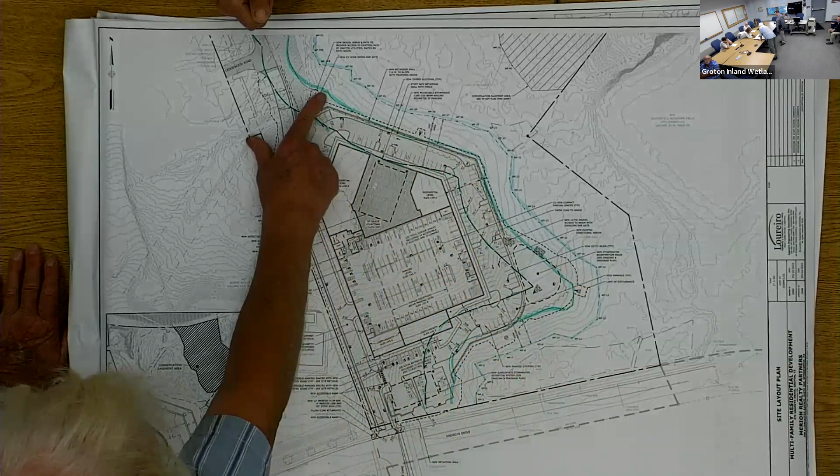There will be planting, I would say, around the toe of the basin would be a prime location, where we have the outfalls. This one's for stormwater. These areas are good. And at the toe -- now these are retaining walls, so below the retaining wall is going to be the area that we're working with. So we'd be planting here, though, you know, here's very steep, but in this area we do have opportunity for planting.

So in some places it's fairly narrow, but in other places I noticed there are invasive trees there. So this tree canopy may also change to some extent where we're removing invasives, say for instance if there's a tree of heaven or a black locust. So those could provide planting opportunities as well.

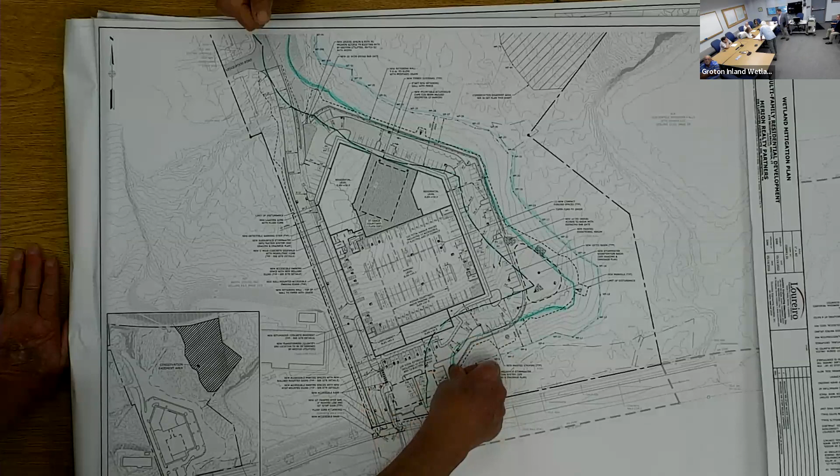So that's one of the reasons that I don't like to show each individual tree. I'd rather give you a number of the quantities of what we're going to plant, and those would be field located based on the conditions post-construction, which we can't know now exactly.

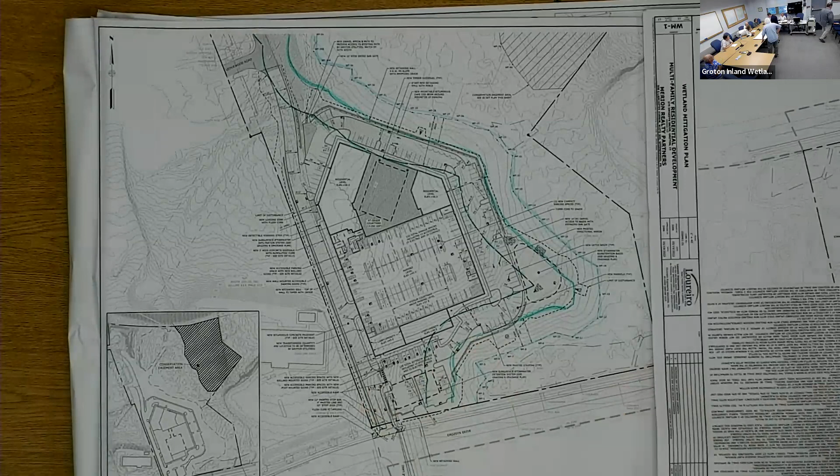Seamus Ryan for the record. So that's what this plan shows. We didn't put exactly where the trees and shrubs will be, but all of the green areas, based on the color code of the plantings -- green column here, red are in the red column, and gray are in the gray column. So using these plantings, using the list with this color code, Jim will place them where he sees fit in this area.

But could you please point out the existing tree canopy on this map? Yeah, it's right here, still the scallop line. So there will be planting with... it looks like. I remember this map from the last time, and that's why I'm asking this question.

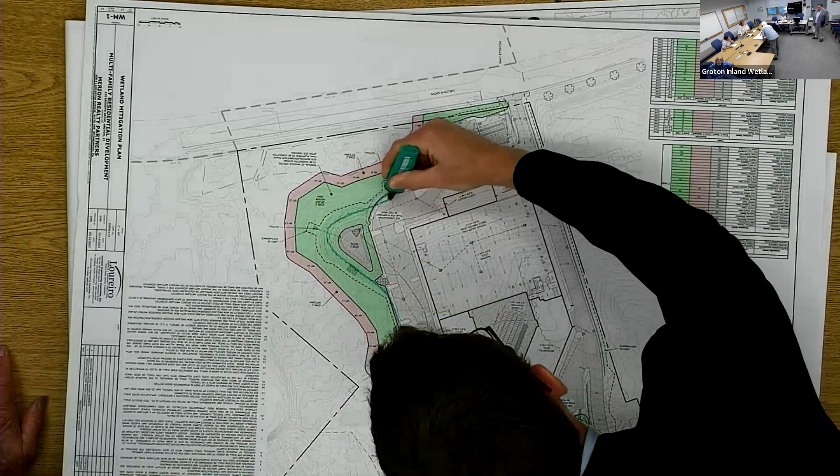So I'm just making sure I'm clear - that's the edge of the canopy. Right, the trees are, you're going to set back, protect the creek tree cover, the canopy line, but then you're going to be working within the 50-foot upland review area.

Right. And so in some areas, the tree canopy currently is thin, that we'll plant. In other areas we have a denser tree canopy.

So we've provided an adequate number, and what I'm recommending are small wildlife grade trees that are more affordable. There's a couple of reasons for doing that. Planting wildlife grade material, they're seed grown.

So they're New England ecotypes, as opposed to a cultivar that might be from North Carolina. I like to use New England stock, and the seed grown will reproduce and have viable seedlings. Whereas a cultivar, they're all genetically identical, and so even if they cross pollinate, you don't get the diversity that you would from seed grown.

The other thing about smaller seed grown plants is they're easier to install. It's a rocky area, so if you have to get a tree spade in there to plant a big root ball, it's more difficult, and they don't tend to do as well as a smaller seed grown plant.

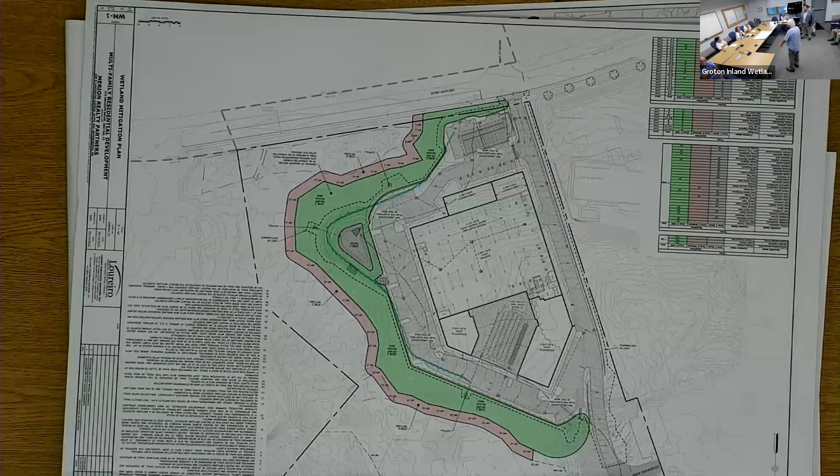Okay, well, yeah, absolutely. I don't anticipate - if I were going to have a third color here, it would be right along the edge of the silt fence.

Well, that's why, quite honestly, his picture was better than yours. Shay was just saying, because this one - this is the one I remembered from the last time. And I'm like, that's right.

So the planting's mostly going to be along the limit of disturbance, between the limit of disturbance - say, which is where the silt fence is - and any retaining walls or pavement. So you might be on the other side of the silt fence in some places.

Yes, and those are places that would be appropriate to go across because the canopy isn't thick there. Again, there's - I usually trust you.

Mhm, but unfortunately, in the real world, stuff happens. Do you know what I'm trying to say? Yeah, stuff happens. Right, well, stuff happens, yeah. And that's - I just, we've all been playing this game for 30 years, and we just have seen a lot. I know, and I have also, I know.

I get called after everything's built and asked, will you come and inspect it? And the plans - I was supposed to be there before you started, and I was called in three years later. So that's just my only concern, because now we're basically saying okay for work.

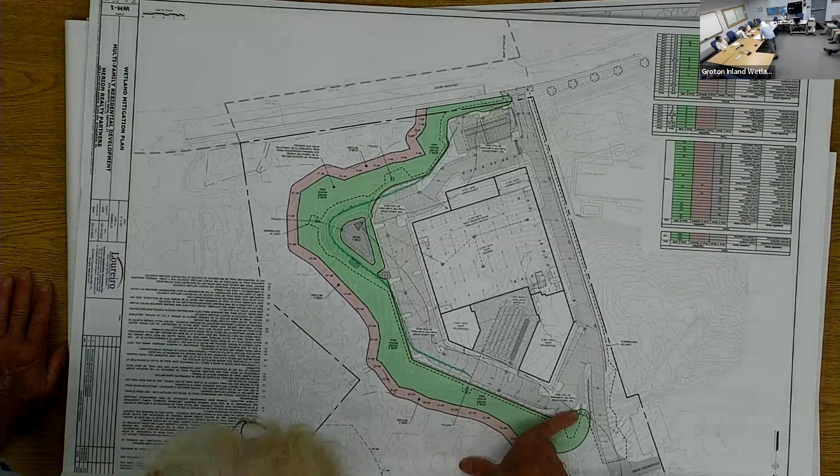One of the things around the perimeter, just as an attention to detail, any place where there's not a retaining wall—I don't know if there are very many places, I think down in this area—what I recommend is a no-mow ecological lawn seed mix that doesn't require lime, fertilizer, or water once it's established. It can be mowed, but mowing's optional. It only gets nine inches tall. So it's an informal grass edge, but if you're getting out of your car, you don't want to get out into a four-foot tall meadow.

Can you remind me how tall the retaining wall is? I think at the highest point, in one section, it's all one height and then tapers. Three to six, is that what you said? Sorry, six feet at the highest point in one section, but it tapers with the grade down there. Tapers with grade, gotcha, sorry—I'm getting older by the minute, my hearing's going.

The point is, typically on a project like this, usually a three to five foot verge, which is the edge of pavement, is a mow zone, just so people can get in and out of their cars or walk and navigate. So that area would be a no-mow lawn seed mix.

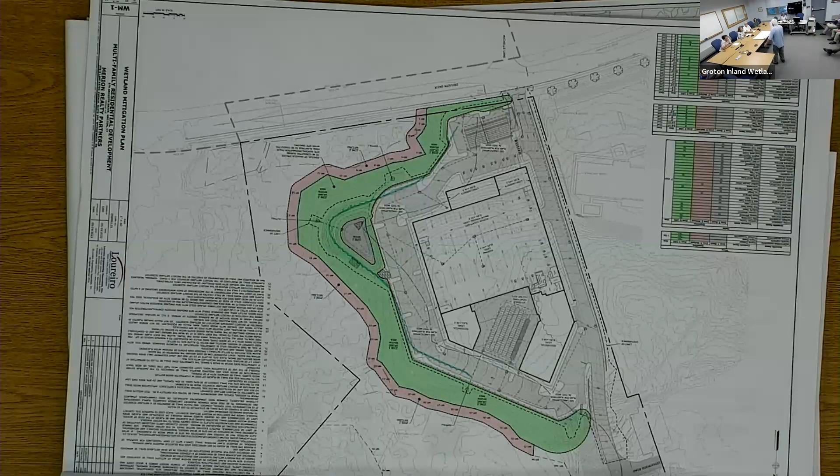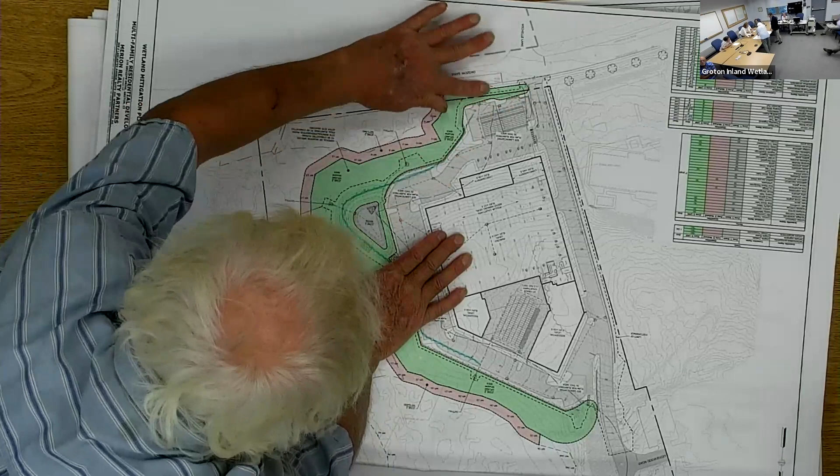But where is that, Jim? So if this is the retaining wall, you're gonna mow on the other side of the retaining wall? No, along this edge here, below the retaining wall, there's a parking area, and I don't know if this zone around the parking is designated for mowing. I would want a no-mow mix at the edge of pavement, so you're not having runoff with fertilizer going into your wetland. Of course, this isn't going into the wetland, it's going the other way, but nonetheless, that's just a general guideline. So you're not talking about this area being a mowed area. No.

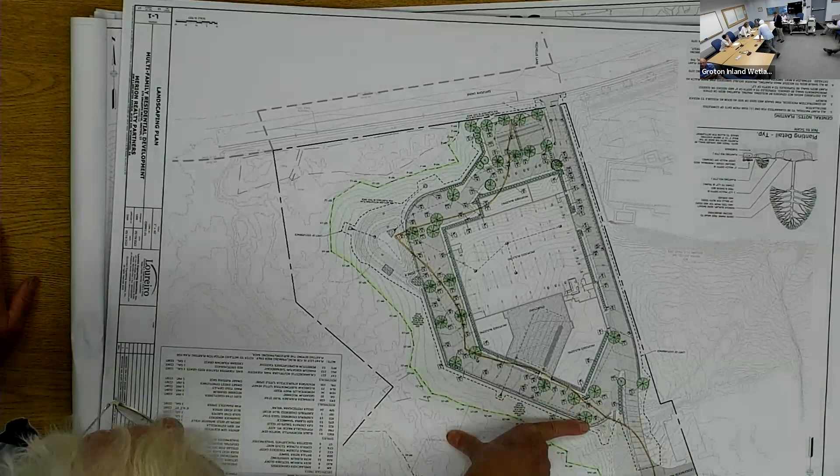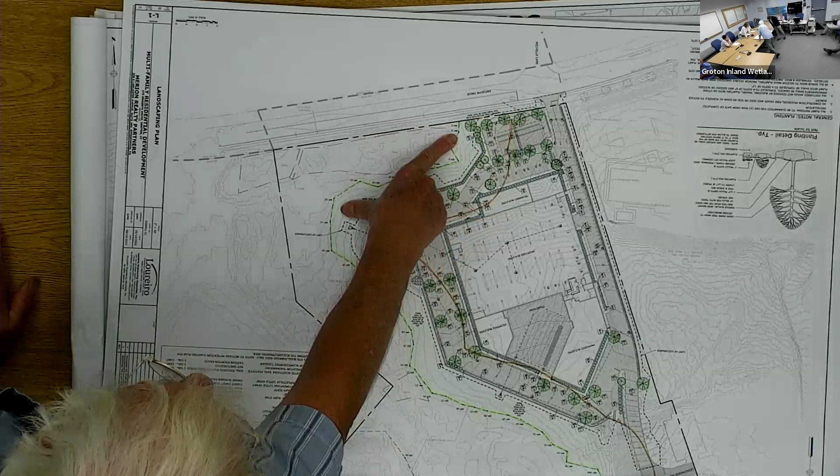Landscape architects prepared a landscaping plan for the other areas, with shrubs and grasses specified on the plan. That's in the parking area, between the parking area and our meadow plantings. If the meadow plantings come up close to the edge of pavement, it would make sense to have a no-mow mix, so people getting out of their cars have an area that, even if not mowed, is only 9 inches tall as opposed to 3 or 4 feet.

All right, other questions? We do have a draft motion, and I sketched out another condition based on some of the conversation regarding the wetland scientists. I love that so much. If somebody can read it. I can read it.

I'll make a motion to approve Inland Wetlands 22-05, multifamily residential development at 375 Drosdick Drive, for the construction of parking area, utilities and stormwater facilities and upland review area associated with a multi-unit residential development, for the following reasons: there are no wetlands or watercourses lost as a result of this project; the sediment and erosion control plan will protect the wetland during construction; the applicant has proposed a wetland mitigation plan that will enhance the site's previously disturbed area.

This permit is subject to the 4 standard conditions and the following modifications. Number 1, the erosion control shall be adjusted to protect the wetlands during the sewer connection to Drosdick Drive. Number 2, a long-term maintenance plan for the wetland mitigation area shall be developed for the property owner and approved by the planning and development staff prior to filing the site plan in land records. Number 3, a wetland scientist shall oversee the mitigation plan and certify that it has been completed per the approved plan.

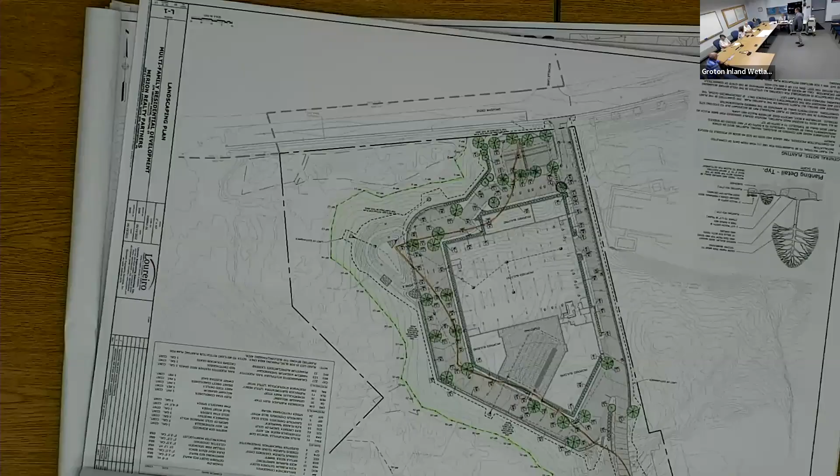Cool, carry on. You want to put it up? I'd like to see its location. This is right next to the suites, the little hotel, right across from the toll gate on Gold Star. Let me just turn it so it's right side up... but then they can't really see it. Okay, let me just see things in there.

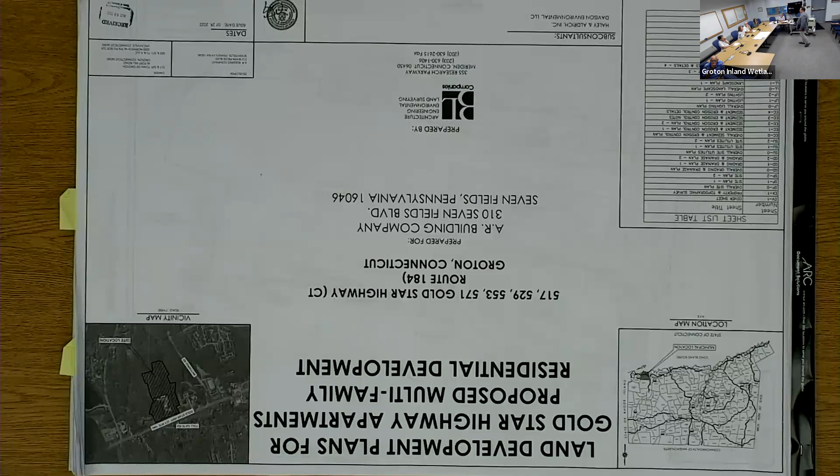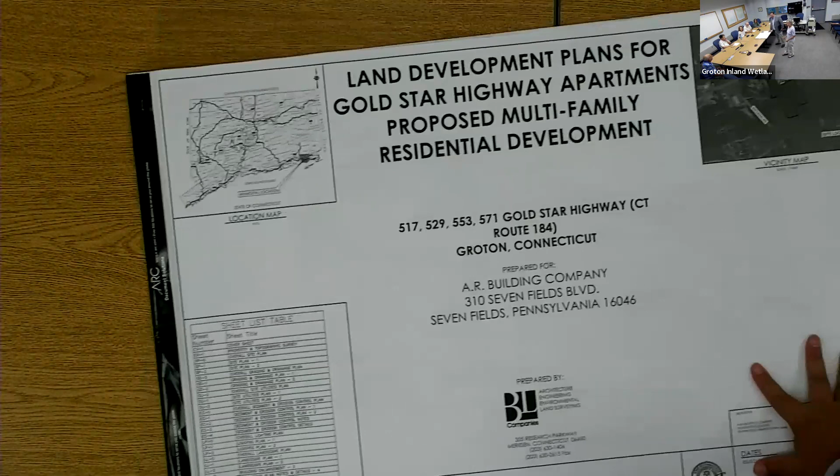The site was surrounded by water, wasn't it? This Walmart thing, it butted up to Avalonia. The Avalonia portion now has some wetlands on it. I'll show you in a second—basically dry, it's a big chunk of rock, piecing together a bunch of properties. Has this been developed already? No, it was never done. Remember where the old plumbing place used to be—Shetucket Plumbing—right across from where Toll Gate Road comes out. I'll turn the page, because maybe it'll help you guys. I can give you a little bit back.

So here's the site. For the record, my name is Bill Sweeney. I'm a land use attorney and a partner at Tobin Carberry in New London. I represent a company called AR Building.

AR Building built the 150 units across from the sub base up on the hill on Route 12 several years ago. They built a lot of the new apartments in New London as well, so they're pretty active in the area. They've got projects all over New England now. They're a company out of Pennsylvania that owns about 10,000 units of luxury housing throughout the Mid-Atlantic and New England.

And they're working on this site on Gold Star Highway. A little bit of background on it: the parcel itself is right across from Toll Gate Road, which comes in right here, on Gold Star Highway. It actually right now consists of 4 parcels.

The Fatone family owned Shetucket Plumbing for many years. This is the old Shetucket Plumbing site. That building's been torn down if you've driven by it. To the east of it is another vacant, wooded parcel owned by PJ&A, which is the Fatone family holding company.

About 3 years ago, before COVID, the town put out these 2 parcels — town of Groton parcels, a total of about 12 acres of land — to RFP for development. One of the things they were looking at was multifamily housing.

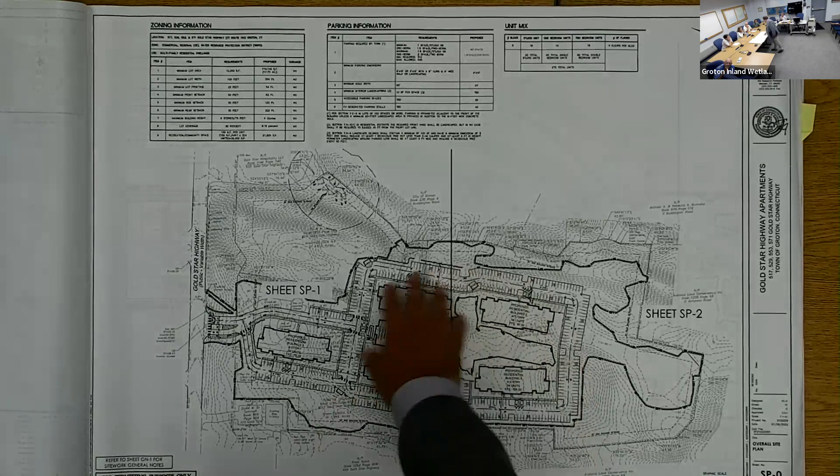We're trying to keep as much of the existing vegetation on the site as possible, even keeping trees between the buildings. We want to keep it very forest-like, keeping the natural vegetation to the extent possible. The southern portion of the site up against Avalonia, we're really trying to limit our clearing and keep some large blocks of forest land as well.

One of the issues is this is in the water resource protection district, so we have limitations on how we can deal with stormwater. We really have to use surface detention basins. I'll show you on the next plan some of our surface detention.

This is just a blow up of the site plan, the front half of the site along Gold Star Highway. We've got a match line to the back. Again, it's a blow up of the plan we just looked at, and here's the back side of the property.

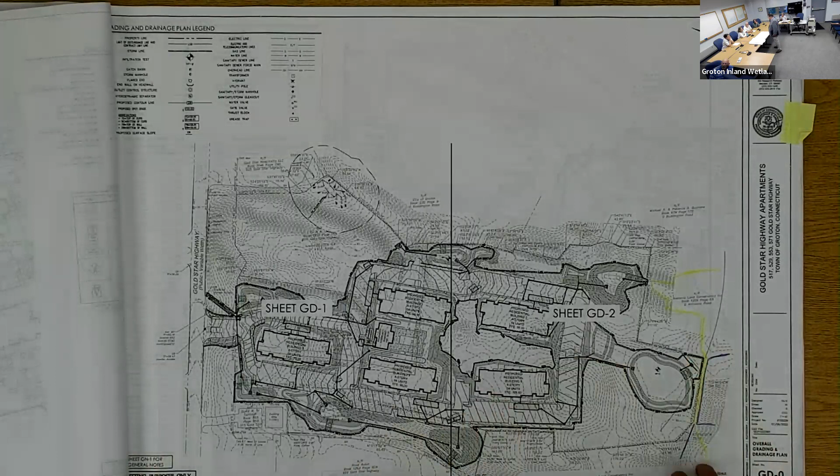So here is the drainage plan for the project. We have a series of catch basins. All the water that comes off the roofs is captured and put in subsurface infiltration, which we're allowed to do because it's roof water. But all the water coming off the parking lots is captured by deep sumps, hooded catch basins, run inline through hydrodynamic separators, and into a series of detention basins. You can see we've done a group here, a group here, one here, one here, one here, and one here. Why do we have so many surface detention basins?

We're trying to match - remember I said that when a drop of water falls, it goes 6 different ways on this site that's all rock. We're trying to match those flow patterns as much as we can. So if a drop of water fell here and it used to go this way, it still goes this way, but now it goes through a hydrodynamic separator into these detention basins.

These detention basins are structured so they'll have outlets discharging into the basin, and then there'll be an invert for an overflow that's a little bit above. The water will come in, do some renovation in the detention basin, and when it hits a certain level it will begin to trickle out through these pipes. Each one has an outlet pipe that we've included. We've also included emergency overflows.

We're required to by your regulations in the DEP stormwater manual, so that on very large storm events, like 50, 100-year storms well above the design storm, if it did overtop, what we do is try to recreate the same discharge points that exist today, so that it will flow in the same direction it was flowing when it was all rock. The big thing is we've been able to keep our peak discharges reduced all the way up through the 25-year storm on this project.

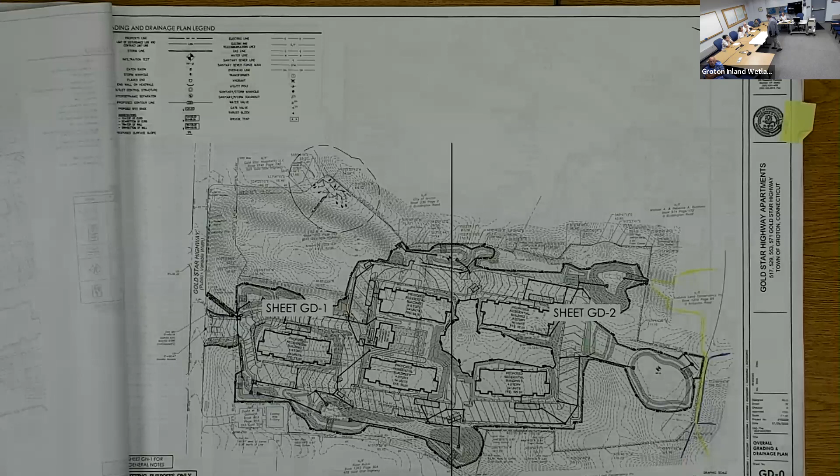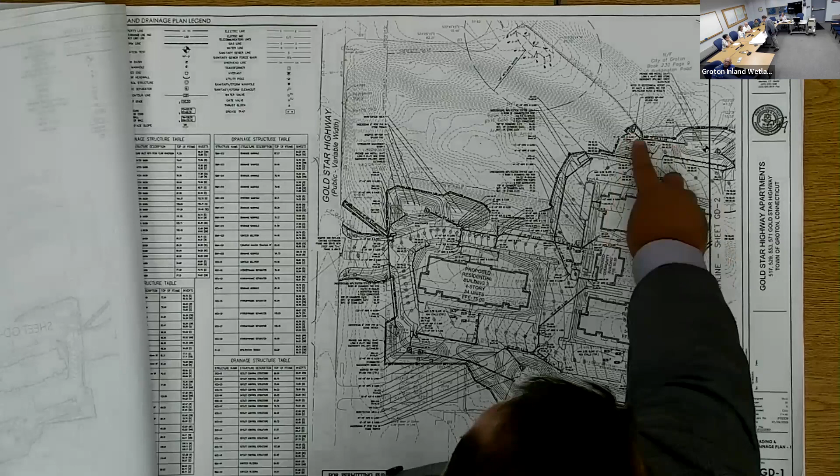Again, here is the one wetland on the property with the 100-foot buffer. We do have a discharge point. Right now, all the water in this area comes down through this swale. This detention basin has that raised invert - it discharges to a pad and slowly leaks that water out into the same swale, where it gets renovated through that area. Again, that is almost 200 feet from the edge of the wetland.

And then in the back property as well, right now there's a swale right here.

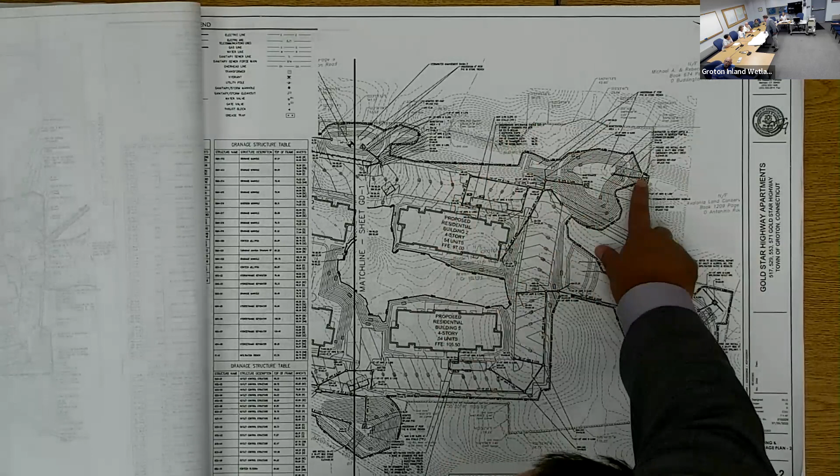All the water here sheds this way onto the Avalonia property. We pick it up, keep it in the detention basin, and meter it out over to the riprap pad to the same swale that it goes to today. Same thing with the largest detention basin in the back. We take up all this area, which flows this way, pick it up in the detention basin, and then outlet it. We have a little more room to work with because the swale is wider, so we actually put in a level spreader to spread that out and make sure there's no erosive velocity.

So again, the only wetland on the property is this wetland. We are not doing any work within your jurisdictional area. The closest off-site wetland is on the Avalonia property down at the base of this swale, based on the first drawing that I showed you.

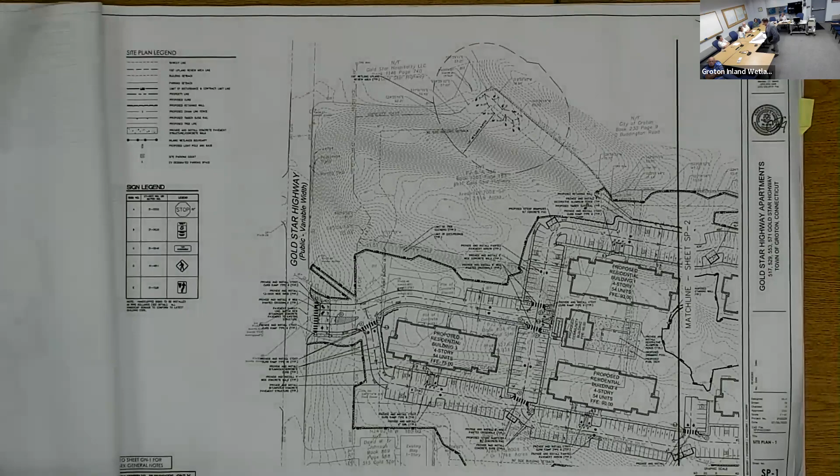Where we showed the view area - let me just go back to that page. I'm pretty sure they've asked us to measure out the 100-foot upland review area to that, and it doesn't touch the property line. So all of our disturbance is outside the 100 feet.

Under Connecticut law, you can only regulate what you have jurisdiction over. That being said, there are some court cases that say a commission may extend its jurisdiction outside of its upland review area. To do so, you have to make a finding that there is something going on outside your upland review area that has a likelihood to cause a significant adverse impact, not to the upland review area, but to the resource itself.

I don't think that's the case here. Certainly, there's nothing in this area. And even in this area, as I said before, this is an existing drainage way going down. As long as we've designed this outfall to meet standards and make sure there's no erosive force in that area, there should be no adverse impact whatsoever. Our engineers have basically laid this out to that extent right now.

We are going to be reviewed by planning and zoning, but Deb thought this is a big project - a project with town-owned land involved in it too. We have a contract with the town council. She wanted me to come before you and at least share what we were doing.

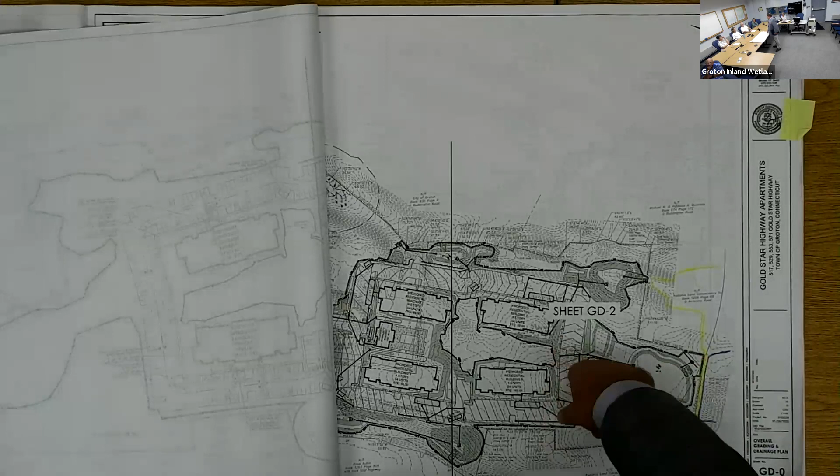One of the things we want to try to do is there are walking trails on the Avalonia land. We really want to work with Avalonia to create connections to our project. We don't want the public coming onto the private project, but we certainly want the ability to have trailheads on this project. That's hard to do - for people living here to go and use the Avalonia trails is easy, but the other one is hard to do. It's difficult for security and safety reasons, but we certainly want to try to make those connections with Avalonia, because that's a huge benefit to this project from our perspective.

These are higher-end units. If you've been inside any of the AR units, you know these are all granite countertops, stainless steel, cutting-edge units, really targeted toward the EB workforce and the engineers and the growth of EB based on the Columbia class submarines. Those are the core of who our tenants are. I represent AR for 7 years now. I have 7 projects in Connecticut under development or construction right now, and they're a company that stands by their work. We work really closely with Deb and Diane was still here to get that project on Pleasant Valley Road approved.

So I have a question - yeah, go ahead, this is really for you guys. If you put a detention basin in, is it not like a vernal pool? Didn't you just create a wetland? Is that within our jurisdiction?

It wouldn't necessarily at the beginning of construction, right after it's constructed, meet the definition of a wetland or a watercourse in this case. But there have been certain circumstances in town where, over 10, 15, 20 years, it has met the definition of a wetland. So no, right when they construct this, I'm quite sure it will not meet the definition of a watercourse. If they intercept groundwater, and you get wetland vegetation and standing water in it, it may indeed at some point meet the definition. Over a period of years, you may have a situation where it becomes a wetland over time.

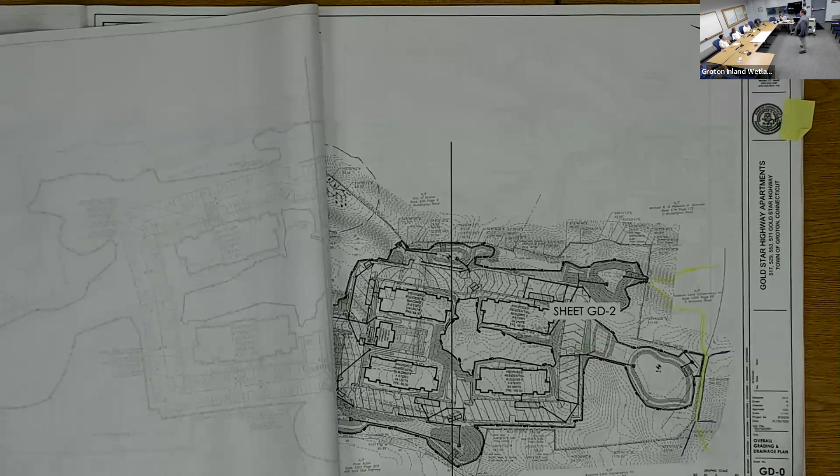The same thing happened down on the Sunoco property by the airport, where they had gravel pits abandoned for 40 years, and they are wetlands now. I suspect the depth of these ponds, they're not going to intercept groundwater, so it's very unlikely to become hydric soil.

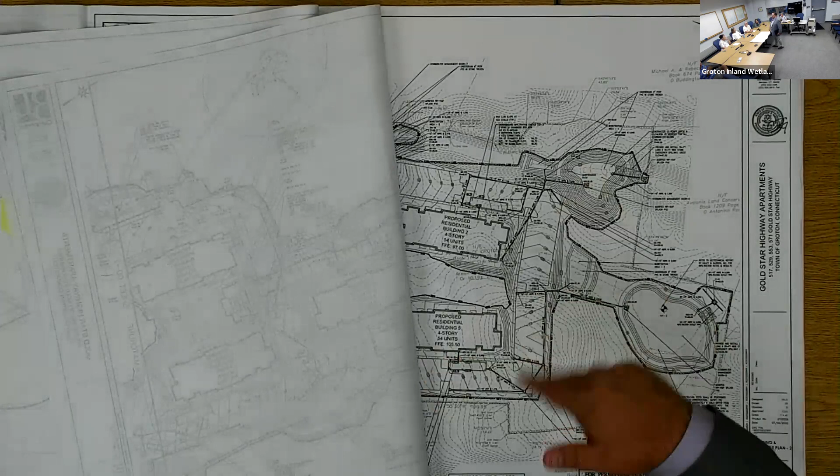The ponds are fairly shallow. This is the deepest pond we have - the base is at 85 and the upper limit is 92, so it's 7 feet deep. That's the deepest one. The biggest pond has a base of 92, top of berm 96, so the biggest pond is a 4-foot depth.

But again, that's going to be their liability. You don't permit the creation of wetlands, you permit things that happen in a wetland. So if it turns into a wetland years from now, and then they come back and want to put something right next to it, then they have a problem - that's when the problem lot comes in.

So these will be open, vegetated - there'll be plantings in these ponds and they'll be open. We can't, like you might have seen on a lot of projects now, use the subsurface infiltrator systems.

We just did it on Drosdick. In your water resource protection district, you can't do that because of the concern about something getting in there and into the groundwater table. So it was one of the challenges on this site - we like to use those systems in a lot of sites since the cost has come down, making it advantageous, but here we have to use surface detention.

There's also a requirement to keep a certain percentage of the site undeveloped, so we had to keep at least 20% in natural conditions. We're doing that on this layout between this area, the center area, and that northeast corner where we're not building.

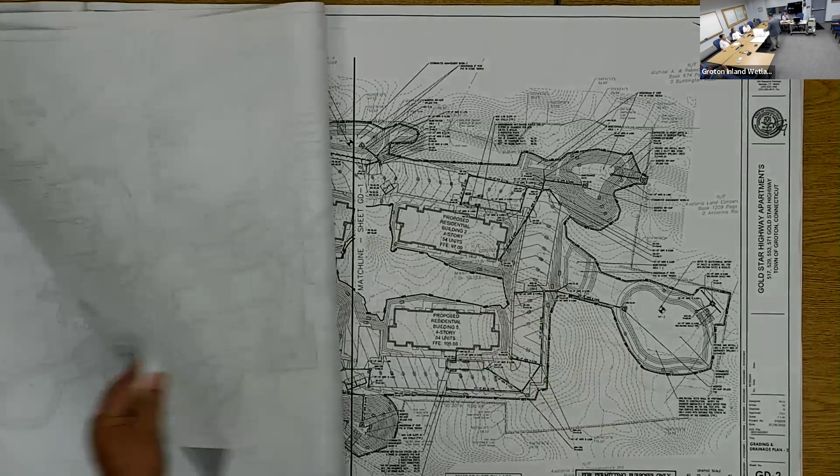You really gonna be able to keep that center area without blasting it? That's gonna be interesting - the center area? Yeah, we'll be able to. There's a knob right here. It's actually going to be pretty cool. It's cheaper for them, frankly. I think they will do that.

If you know where L&M Hospital is in New London, behind L&M off of Mansfield Road, that's AR's first project in the area. They had a knob of rock 25 feet high that they blasted down for that project, and they're doing phase 2 of that right now. They work with Cherenzia companies out of Westerly.

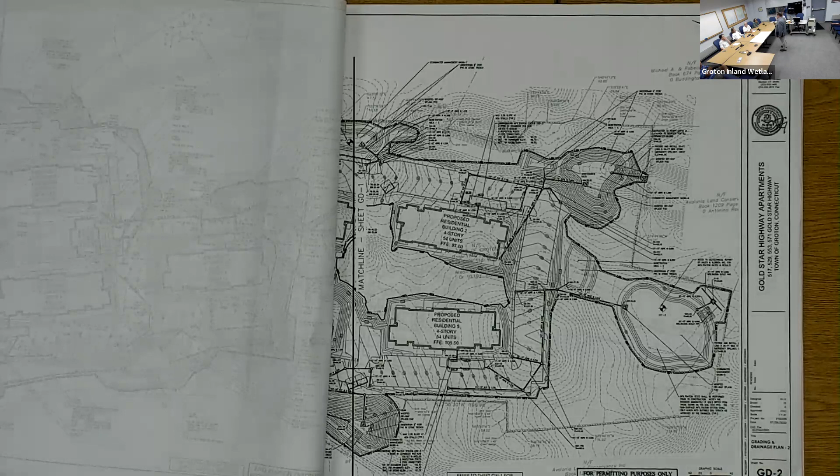So they're not afraid of difficult sites because they're vertically integrated. I work with the development arm of the company - they own their own construction company, and they manage their own properties too, so they have a management arm. All the buildings they build, they keep for their portfolio, meaning they never sell them. The company was formed in the early 1960s, and they've only sold 300 units in all the time they've been operating.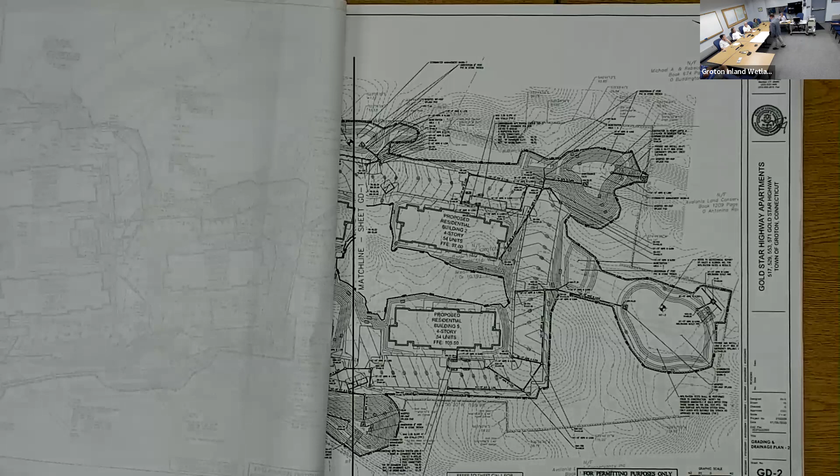So they're owned by one individual - it's a privately held, closely held firm. Dick Nurnberg owns everything, and he just builds his portfolio. They have a certain way of doing things, a certain standard you have to meet because of him, and they're probably my best client in terms of being able to perform and do quality work.

One of the things, while I don't believe this falls within your jurisdiction, we work really closely with your staff - we have a great relationship with Deb's office. So issues regarding erosion and sediment control, issues regarding stormwater design, we're going to work with them on those. I'm confident that what's shown on the plan will be built to that, because they're not giving it to a builder to build - they're building it themselves, and building it to last because they're going to hold it.

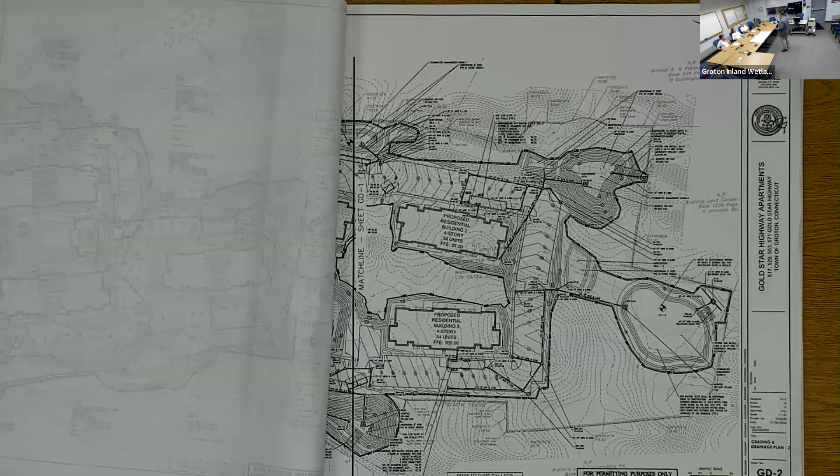They're a great client, and this is a property the town has been trying to get developed for a long time. We're coming up on 3 years from the original agreement date. It's a complex deal with a lot of moving parts - we've got the private property owner, the Patone family, the town with these parcels, and a regional developer. But the town council's been unanimously in support of it. This is the kind of housing the town wants, and we think we can do a really sensible project on this piece of property.

But I did want to come tonight because Deb asked me. Any words from us? Well, I need to know whether or not you want to require a permit for this, or if you believe it does not need a permit because it's outside the regulated area.

I believe it does not require a permit. We still have to protect the wetlands on site. If there are any issues, we fall within your jurisdiction - if we do something wrong up here, we've got to take care of it. I work across the river, and I like doing business here. You have my word that we're going to make sure we do it right.

That really wasn't my concern. My concern was the off-site wetland - they are discharging stormwater outside of the upland review area, in an area where stormwater flows now. But given that it's maybe 110 feet from the wetland rather than 100, I didn't want to make that call. I might have made the call if this site were flat and just told them he didn't need a permit.

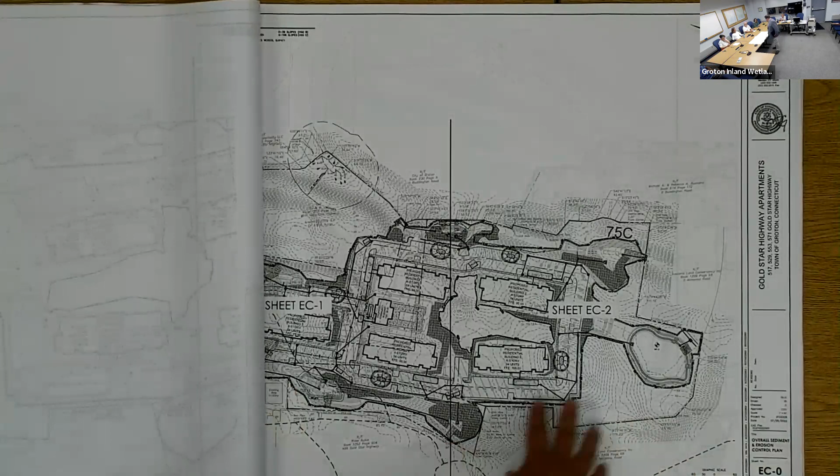The sediment and erosion control plan will address that - it's going to address dust control for sure, as well as any kind of anticipated runoff through here. We have control matting for erosion in that general area. But the thing is, this site is a cut and fill site, so you're not going to have loose rock everywhere.

Take a look at this - if you flatten it out.

I called it a moonscape - we have to create a flat area for ADA purposes. So we've got, literally, you go out there and it's up and down, up and down,

with swales between these knobs of rock. So this central area is all going to be leveled, except for this area here where we have the trees. We'll be cutting, pushing and filling.

We may actually need a little bit of fill on this site, but we haven't completely calculated that out. In general though, it should balance out - it's very close to balancing right now.

The other thing I'll point out is that at the sidewalk, behind that plumbing place, there was a mess back there, wasn't it? There was - it was junk piled up, cement and a bunch of stuff.

I think I remember saying we noticed there was an area that might be a wetland down there, and we were commenting on that. We saw that - that was a long time ago.

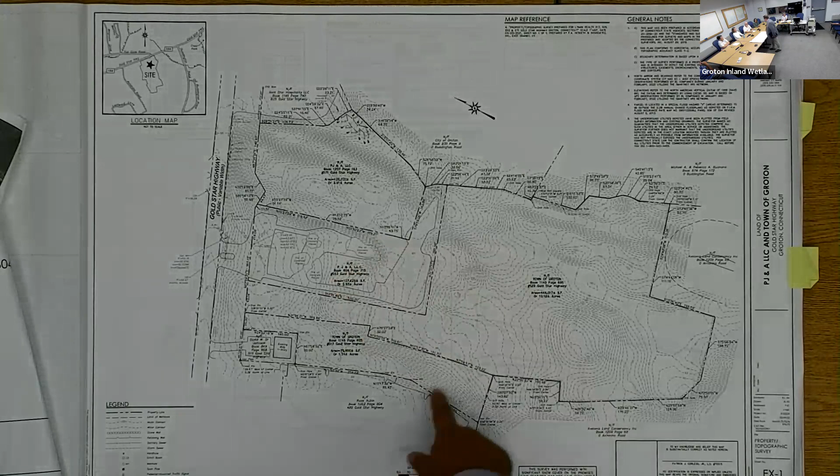We looked at the old air photos going back to the 30s - this was all farmland. There was a big farm residence here, and this was actually cleared, but the back was mostly woodlot because it was so rough. We did do a full environmental site assessment for the one piece that had been developed previously.

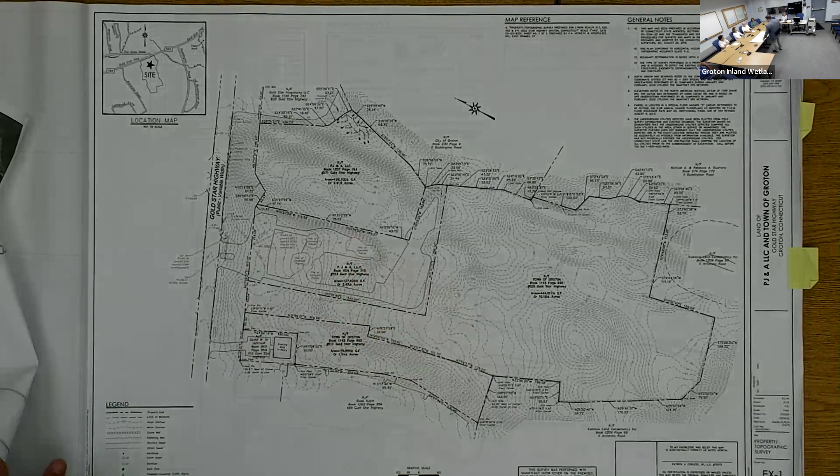I'm of the opinion that no permit is required. We need a motion to that effect. Second. Discussion? All those in favor signify by saying aye. Aye. Opposed? Abstentions?

Thank you so much. I don't typically say this, but I really enjoyed working with you guys the last couple months. I work in front of a lot of land use commissions, and you guys seem to really know your stuff for wetlands - it's a pleasure to actually work with you. Most of this group has been around for a long time.

You'd be surprised at how many towns' people don't know what their legal charge is, or have never read their regulations, or don't even bother to come out to look - because you guys come out for the site walks, which is amazing. I've done presentations in front of people and halfway through they go, oh, I thought this was another property.

I'm like, oh geez. Yeah, I went to a meeting for Habitat - I used to work for Habitat. We had a site in Griswold that had some wetlands, and they asked me to go present it. So I went, and I figured it wouldn't be fair if I didn't tell them I was the chairman here.

As soon as I told them that, they said oh come on, and started rolling out plans asking what I thought. They had no staff - I think the longest person on there was like 3 years. They had no clue what they were doing. Well, particularly because wetlands is a tough board to get people to come out for.